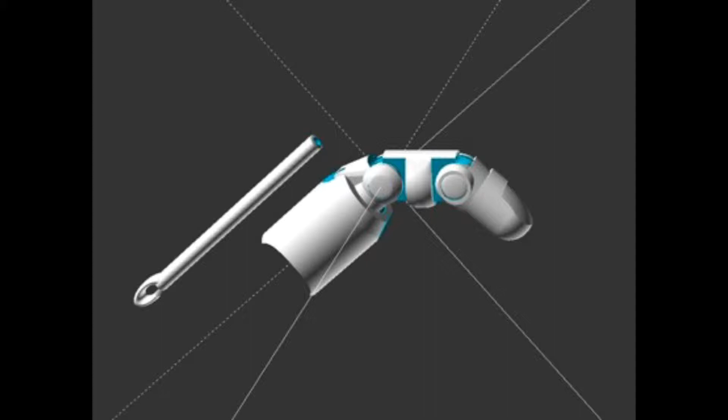Thanks. Our initial idea was to design and build an above-the-knee prosthesis. However, through additional research and some discussion amongst the group, we decided it would be a little too big and expensive for our iterative design and manufacturing process. So along the same lines, we came up with the idea of doing a prosthetic finger, and we knew that the small size of the finger would allow for ease of that iterative design and manufacturing process I previously discussed. We also knew that this gave us the opportunity for design enhancements to both the finger and the palm harness.

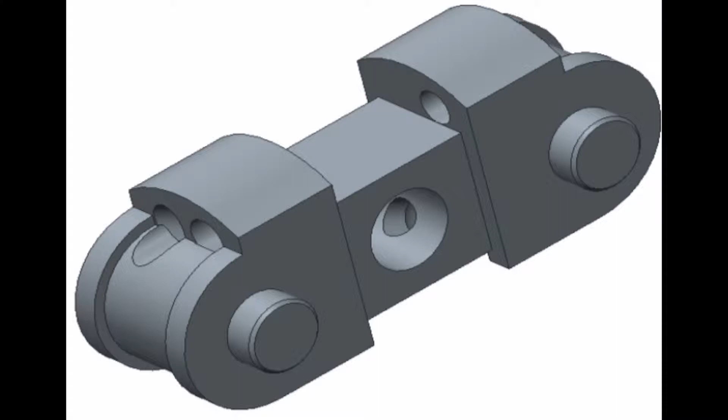So overall, the purpose of our project is to create a prosthetic finger design with a natural feel that is lightweight, flexible, strong, comfortable, and most of all affordable. And that brings me to the goals of our project. First, we wanted to consolidate the parts. What we found on Thingiverse had a few different STLs that would later be assembled, so we needed to consolidate those to meet our project requirements.

We also wanted to reduce the post-processing time. The Thingiverse STLs required some sanding, filing, and drilling, so we wanted to tidy that up. We also wanted to create customizable attachments that provide additional functions. And we also wanted to introduce a new harness design that increased leverage and reduced pressure on the hand when going through the natural movements of the finger.

Hello, my name is Steve Stumbo. My part in this project was centered around the design process. So we pulled the original idea from Thingiverse and brought it down with its STL files. And as I was playing with these files in a variety of different softwares that were suggested in the class, it became pretty evident very fast that we were dealing with STL files with a huge number of errors. I think one of the parts of this assembly had over 300 errors in it, and I was just struggling with trying to figure out these software packages to try to fix these errors.

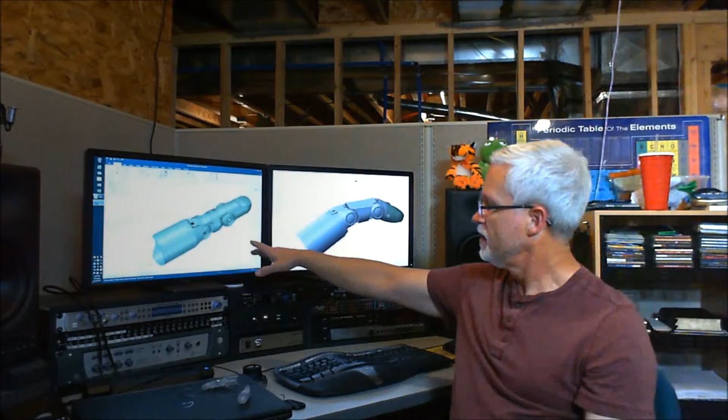So we made the decision fairly early on that we would go ahead and redesign the whole finger, actually redraw it in Creo. And so as we did that, we came up with our design improvements. It's hard to see from the picture here, but you'll notice that this middle section of the finger is made up of a couple parts. We integrated that all into one piece on this side over here, and we also did some better smoothing and blending in the design to make it look better.

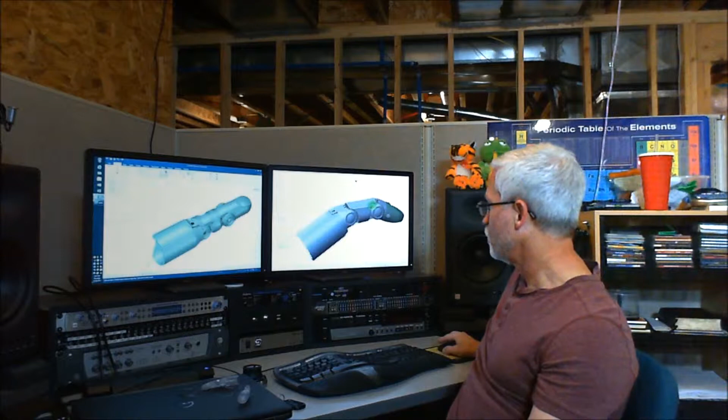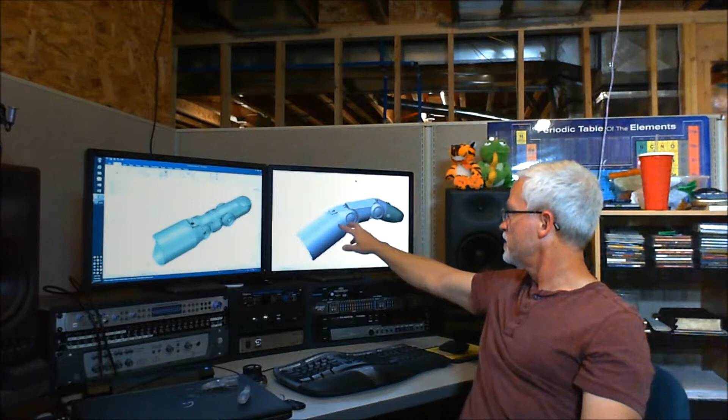Probably the biggest key piece that we did that was different than the original design is, in order to meet our articulating finger requirement of 2 joints, we took these 2 specific joints here, and in the original design they used metal pins that were assembled after the fact. And we said, no, we're going to create this main middle section, which is made up of 3 parts here, minus this socket and the finger, and we integrated that all together. So we got our 2 articulating joints out of that, printed at once, and then we were able to sculpt and combine this middle section into one single part as well.

So at the end of the day, we reduced the number of parts. It did take significant time to redraw this. I think it was mentioned in class that it's really difficult to take somebody's design that's an STL and back out all the dependencies of how that was made, and that was very true. I basically started from scratch here. The one thing I will say is we did integrate 3 threaded joints in this design, and I'll try to get up here in the camera. You can see in there that those screws show, and then the one in the base is in here as well.

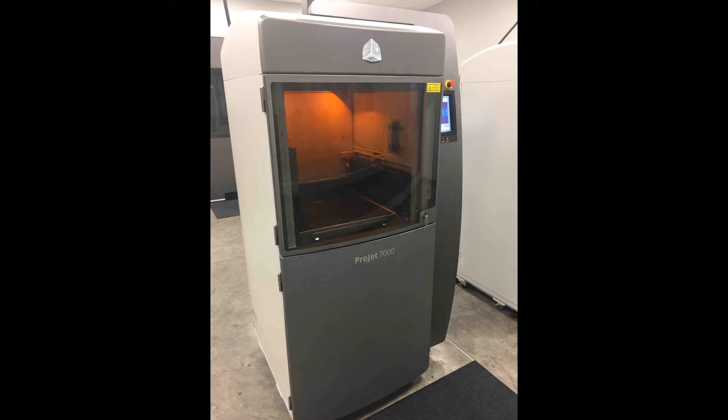All the finger components were printed in the ProJet 7000 by 3D Systems, so that encompasses the fingertip, the articulation component, and also the finger socket. This is done with an SLA process and was printed in a plastic material that is clear in color. We thought it would be kind of neat to see the inner workings of how the finger flexes and extends by all of the wires and cords running through and across the knuckles.

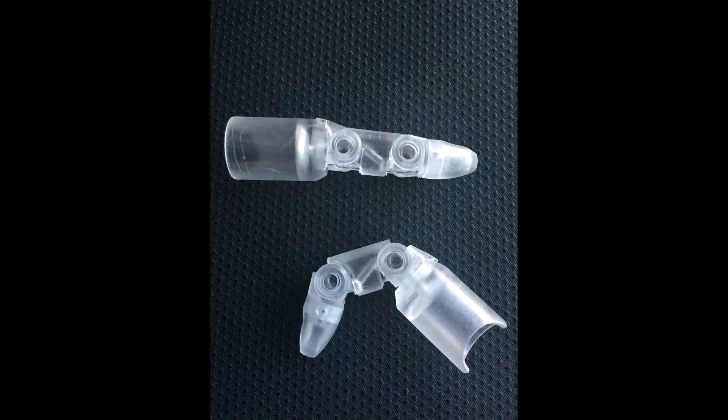This ProJet 7000 is especially good for use in prototyping. It prints with fine featured detail with accuracy of up to plus or minus 50 microns. We built our finger in 100 micron layer thickness, so that accuracy is about half the layer thickness. Our build duration ended up being about 4 hours and 15 minutes, and this was for our final finger plus a duplicate just in case anything happened in transit or in assembly.

My name is Lance Yellowhorse, and I was in charge of the palm harness design for our prosthetic finger.

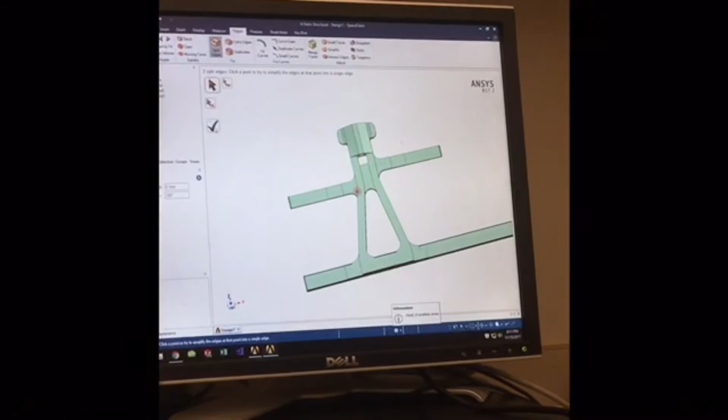Today we're going to talk about the CAD revisions, .stl mesh repairs, the slicing, printing, post-processing, and assembly of our palm harness design. The palm harness was an original .stl file created by Swoozle on Thingiverse. Our goal was to modify the palm harness for comfort, adjustability, strength, as well as support for the articulation of our prosthetic finger. The .stl was originally a mesh file that was converted into a solid body.

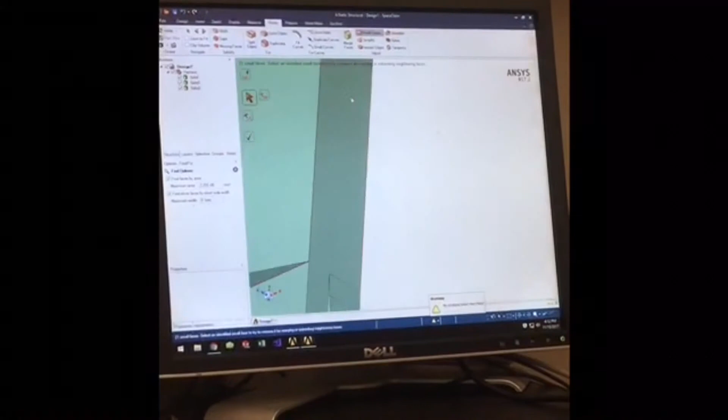70 errors were repaired using ANSYS SpaceClaim. This video shows errors including split, duplicate, and inexact edges, as well as missing faces. Once the .stl file was free of errors, modifications were made to elongate the straps for strength and adjustability of the buckles. The file was then uploaded into Cura's slicing and printing software, where a brim was applied to assist the bonding potential between the bed and the nozzle, and each layer is examined for quality.

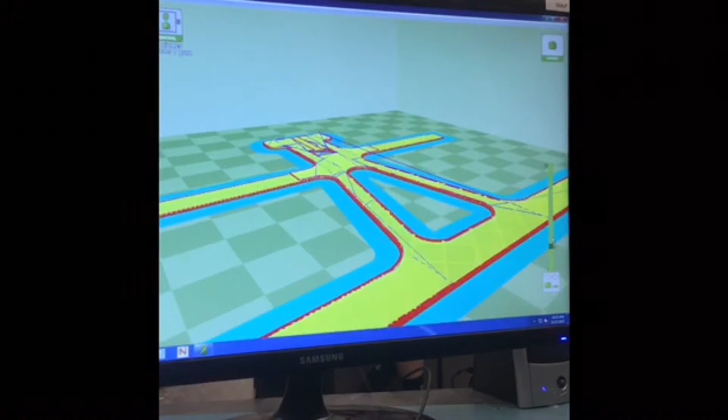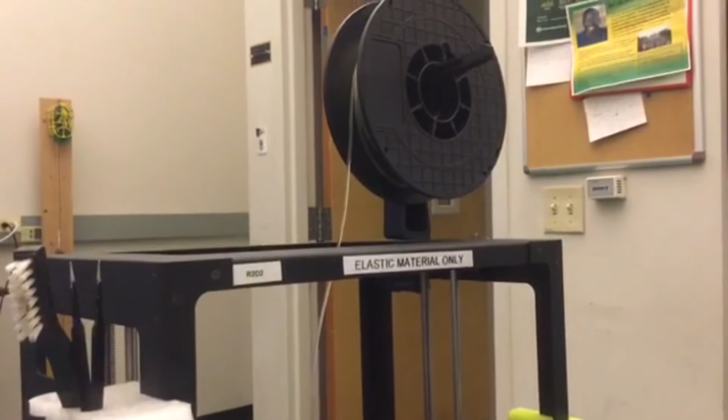Now that the palm harness fits within the build volume, the print is initiated on the Idea to Product Labs R2D2 Flexi extruder, and we can see the NinjaTek SemiFlex TPU flexible filament being fed into the RAM extrusion head. This controls the feed rate, material, state, and precise movements relative to the bed. The goal was to accurately maintain the size and shapes of the roads, maintain convection and conduction, as well as monitor the position and control of the printer.

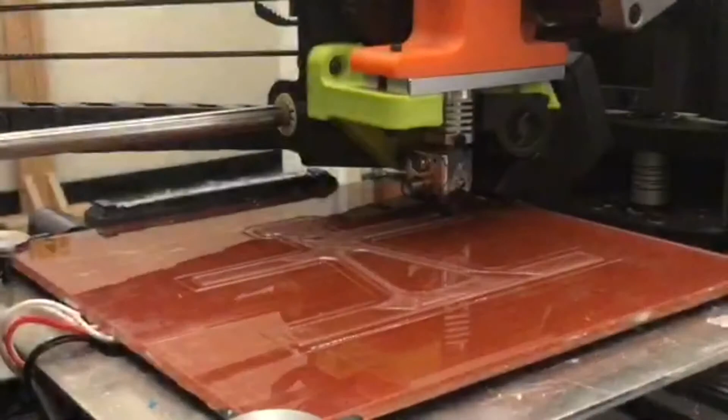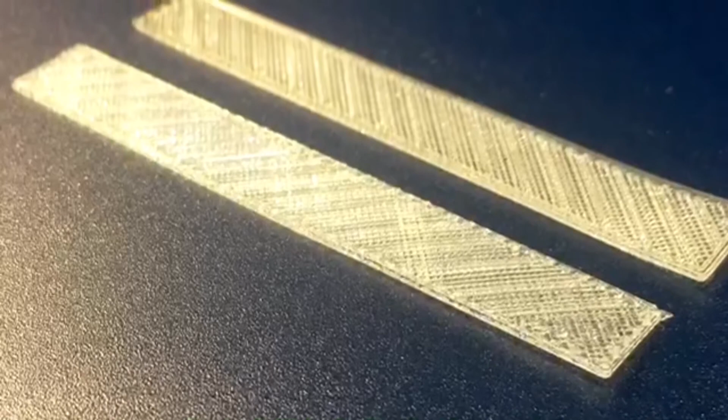We chose this printer due to the reduced cost, 20% infill providing structural rigidity, and flexible material capabilities, soft feel, and ability to withstand high tensile strengths. The palm harness is designed for the right hand and can be modeled for the left hand as well. The video shows a square opening where the anchor block will be applied. I will talk about this part shortly. These images show the final part quality of the palm harness, and the same process was repeated for the wrist straps as well as the palm straps.

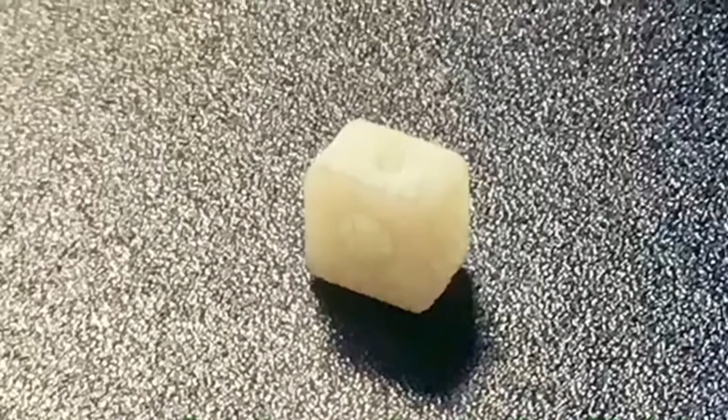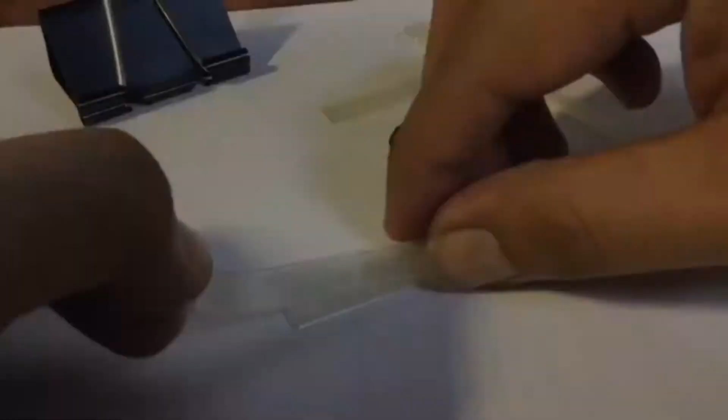The anchor block was created using the Idea to Product Labs Stratasys Inkjet Objet 30 Pro using RGD 450 and simulated polypropylene, giving us a tough, small, precise anchor block that will anchor our tendons. For assembly, a design change was utilized using Loctite superglue to bond the straps together in place of soldering, which will create a weaker joint. The straps were designed to have rods facing rods to increase surface area, adhesiveness, and visual presentation. The straps were fit into position and clamped during curing. This same technique was repeated for the buckles. This is how our palm harness was designed.

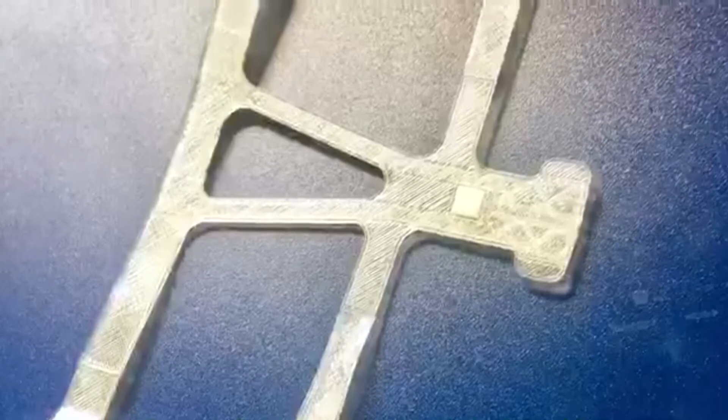Hi, my name is Justin Felix, and my portion of the additive manufacturing project this semester involved creating the final visual presentation for our project. I'm actually located on the west coast, about 1,200 miles away from the rest of the team, so unfortunately it made it impossible for me to participate in the physical build. So instead I'm going to discuss a few lessons learned from the team as well as how team dynamics played into this project. One of the biggest lessons learned, or really reinforced, is that even in additive manufacturing, the process of getting from idea to final product is very much an iterative process.

As we previously discussed, we made multiple adjustments to the middle portion of the design to create a better blended and functional product whilst reducing the number of parts printed. One thing we discussed multiple times in class was systematically engineering a part to reduce the number of times that a product would need to be printed before finally getting a part that fit the fit, form, and function desired. Thankfully, we were able to accomplish this in just 2 prints, even with a team that's relatively new to additive manufacturing. I think we also learned a good deal about how to plan for the strengths and weaknesses of each type of printer and designating parts to be printed or manufactured on printers appropriate for the needs of that design.

For example, the fingers required a higher degree of accuracy to ensure that the parts were able to actuate with a tight tolerance, but were not completely adhered together. We actually ran into this issue in our first print, as the spacing was too small and the rods glued together, making the fingers unable to be used. So for this reason, we printed the finger portion on the ProJet 7000, whereas the harness that required a little bit less precision could be printed on the R2D2 without 100% infill.